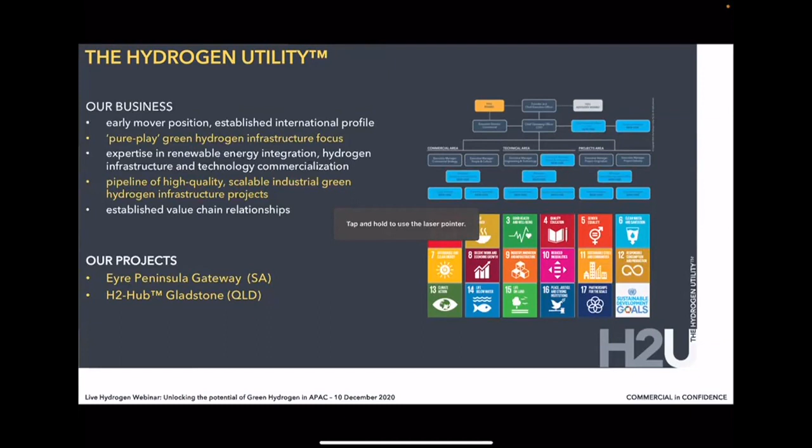Recently, one was in November. Mitsubishi Heavy Industries is now a strategic investor into H2U, our group, but also a technology partner when it comes to key components, really enabling us to scale up our infrastructure development activities, particularly around hydrogen compression, gas turbines, but also more broadly in terms of energy management and digital integration tools.

Just quickly talking about the market outlook, I guess the context in which we're all talking about green hydrogen is the falling cost of renewables. We're now in a situation where large-scale wind and large-scale solar PV are the cheapest form of new generation capacity addition.

There's quite a lot of movement, I believe, is one of the topics connecting green hydrogen and Asia Pacific, quite interesting on offshore wind as well. But really the interesting thing is the downward trend in the cost of renewables and how that cheap renewable power could be harnessed to open up new industries, particularly hydrogen.

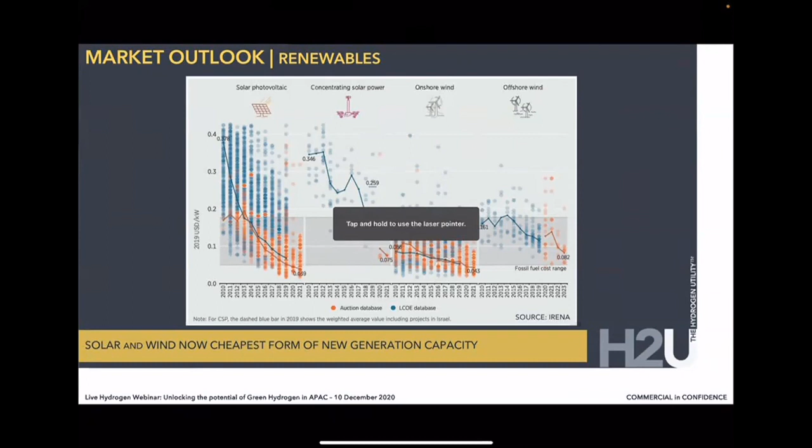In that context, we're also seeing the electrolyzer industry scaling up to meet the requirements of this market and address the market opportunity. What we're really seeing is a very large increase in production capacity in the market.

This is not unlike what happened with the solar PV industry about 15 years ago. The technology was already available, but the industrialization, the mass deployment really started 15 years ago. From about 1 gigawatt of production capacity in the solar PV industry, we witnessed growth to 110 gigawatts. We're working on more production capacity at the moment, but there's already a lot of plants that will take us beyond 50 gigawatts by 2030.

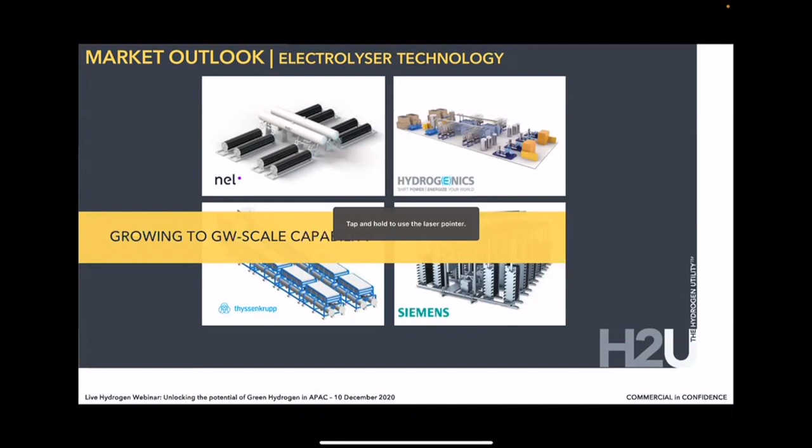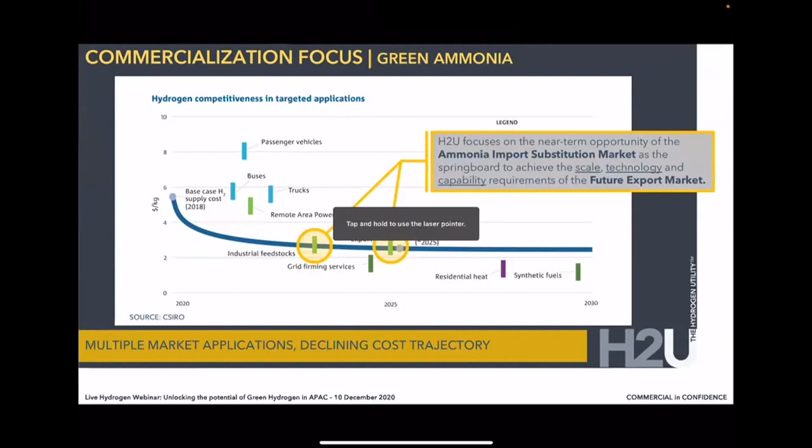Storage, but also industrial feedstocks, mining applications, and industrial feedstocks such as methanol or ammonia. But there is also a longer term trajectory around exporting hydrogen in one form or another to overseas markets. I believe Jeremy will talk about that as well, but also for the shipping market. We really focus on this opportunity around green hydrogen ammonia because, of the domestic uses and opportunities, it's the only one that really warrants the opportunity to work at the scale capacity that would be required.

Sorry, Dr. Attilio, I have to pardon, some audience reflected that there was a banner with the word tap and hold to use the laser pointer on the screen. Okay, I can see it now. Yes, okay, okay, sorry, carry on, it's the iPad.

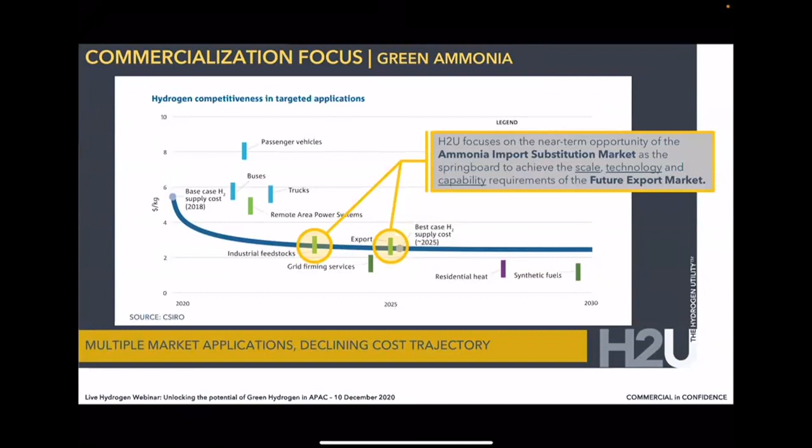There's an opportunity in different economies to look at the ammonia market as an early stage market that allows building at a scale comparable to the export market, because we've been talking about the electrolyzer supply chain scaling up to meet the requirement of the hydrogen market. But really the enabler is not the electrolyzers, it's the balance of plant capabilities and compression, the supply chain capabilities in terms of delivery, and also towards an export market and export terminal. This is really the quantum leap that will enable this type of industrial scale applications for green hydrogen. So with that in mind, we focus on developing a very large portfolio of projects.

As I said, 2 are in the public domain, but we also have others in Tasmania and in New Zealand. They're all giga scale projects. One characteristic of our projects is that they're all grid connected. So we're looking for strategic locations in the grid, as well as port accessible locations for the export market, because we see a unique opportunity to introduce these new large scale power loads to really support the development of hydrogen on one side, but also to help manage an intermittent renewable dominated grid in the future.

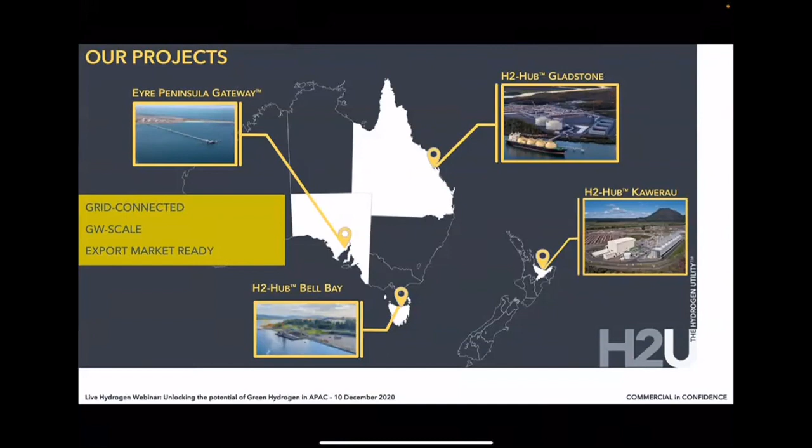We also made some advancements in particular on our Eyre Peninsula project, which we announced at the beginning of November together with the Premier in South Australia, having changed location to have access to a port facility, and the fact that the development still has a demonstrator stage, which is about 75 megawatts now, but will then be developed as a gigawatt class project over time.

We've effectively awarded, and we will announce early in the new year, the front-end engineering design. This is quite a unique situation, because in the space of green ammonia, our project is the first one globally to mark that milestone.

So it really will be the basis for developing this platform, really aiming to be breaking ground on the site towards the last quarter of 2021, and then commencing operational commissioning by the end of 2022.

That concludes my presentation, Bryce. This is my contact details. I hope to take any of the questions.

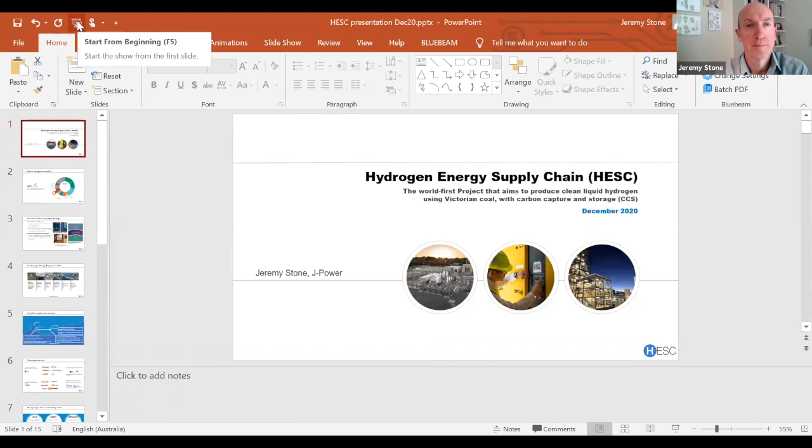For those who aren't aware, J-Power is a large utility company in Japan, about 25 gigawatts of total generation capacity. In Japan, we're about 50% renewable, and we continue to invest in a range of clean energy projects around the world, whether that be hydro, biomass, wind, solar, and of course clean hydrogen, which is the topic of today.

We are part of a consortium putting forward a world's first liquid hydrogen supply chain project. It's about $500 million, and it's located in Victoria, in Australia.

In terms of how did we get here, how did it start? Way back about 7 or 8 years ago, there was the Fukushima accident in Japan.

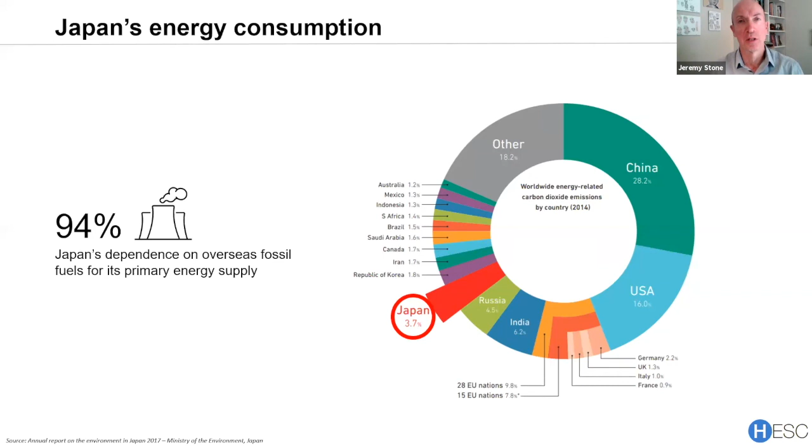Japan had very strong relationships with Australia, and there was existing gasification of coal technology and carbon capture and storage. Hence the aim and starting to build up the project in Australia.

Since that time, there's been many other countries who have now headed towards a hydrogen future. There's about 22 countries with hydrogen strategies, Australia being one of them, released a bit over 12 months ago. It's technology agnostic in terms of how hydrogen is produced, so it can either be with fossil fuel with carbon capture and storage, or it can be renewable, as Attilio was talking about before, the green hydrogen.

More recently, Australia's low emissions technology statement was released, and there were 5 key focus areas for technology development, one being clean hydrogen and the other being carbon capture and storage. So 2 elements very much connected with our project, and they set the stretch target of clean hydrogen at $2 per kilo.

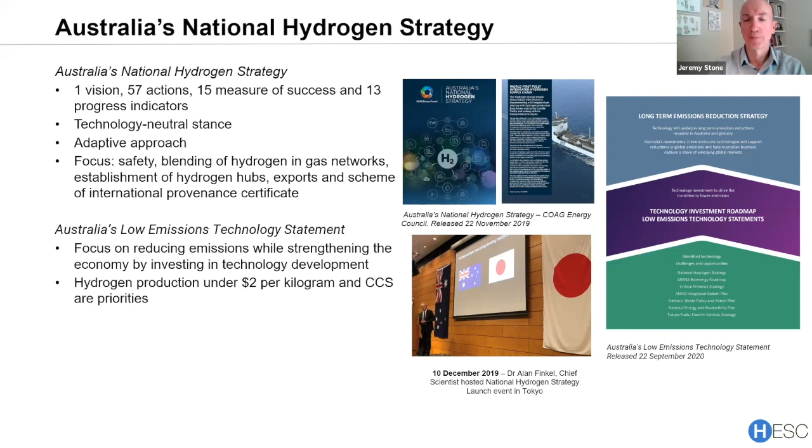In a snapshot, our project, as I mentioned, is a supply chain. It's not to prove up the production of hydrogen through gasification of coal, it's to prove up the complete supply chain.

Starting from the left, we have the coal gasification and refining facility. For the pilot stage, we will truck that gaseous hydrogen to the port of Hastings, where it is liquefied, taken down to minus 253 degrees centigrade. It then gets loaded onto a world's first liquid hydrogen ship, and taken to the port of Kobe in Japan, where it is offloaded.

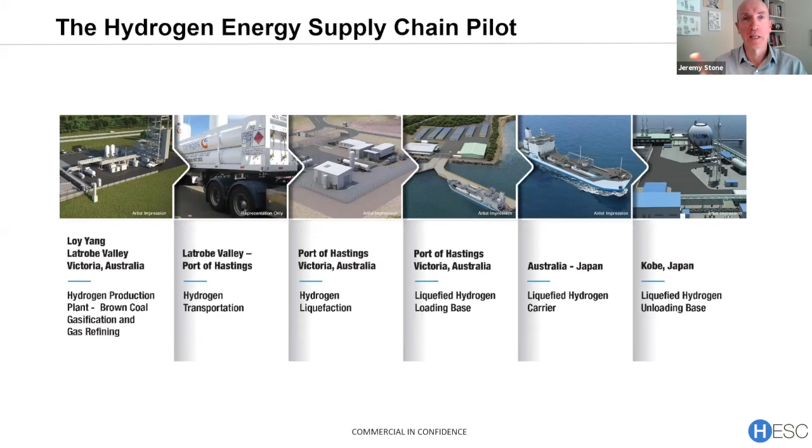So that's the complete supply chain, and I'll now run through the location of where those elements are, then the people involved and the status of those various elements.

For those who aren't familiar about where this all is, Victoria is the southern state of Australia. We are gasifying at the AGL Loy Yang site at the Latrobe Valley. We will then truck it westwards to the port of Hastings, an existing port, where it will be shipped out.

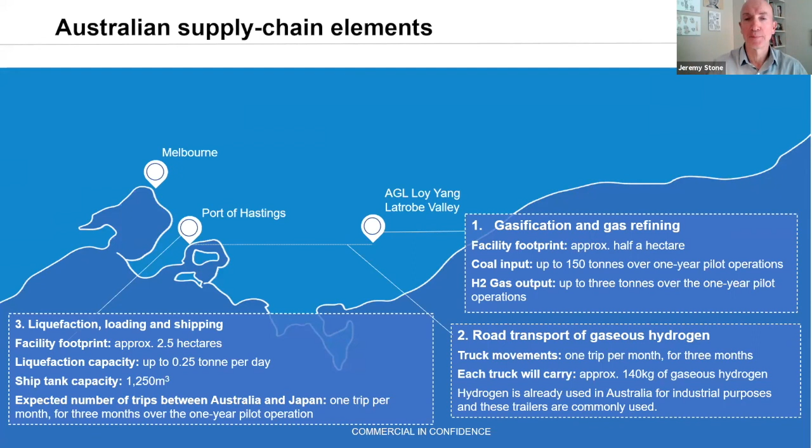Probably there's 2 main questions which we get asked, but I'll ask and respond to the first one here, and I'll respond to the second one in my very last slide. We get asked: well, if you can produce clean hydrogen from renewables, why would you produce it from Latrobe Valley coal? We say there's 3 main answers: one is urgency, the other is scale, and the other is affordability or sustainability.

In terms of urgency, we have an incredible climate change challenge in front of us. If you're aiming for net zero by 2050, we have to do a tremendous number of things all at the same time. We generally agree on where we're trying to get to, but most governments realise they need to undertake a number of different activities at the same time.

So this project, with existing and known technology, can actually save about 1.8 million tonnes of CO2 per year. That's equivalent to taking about 350,000 internal combustion cars off the road. That's what we could save per year if this project was in commercial phase.

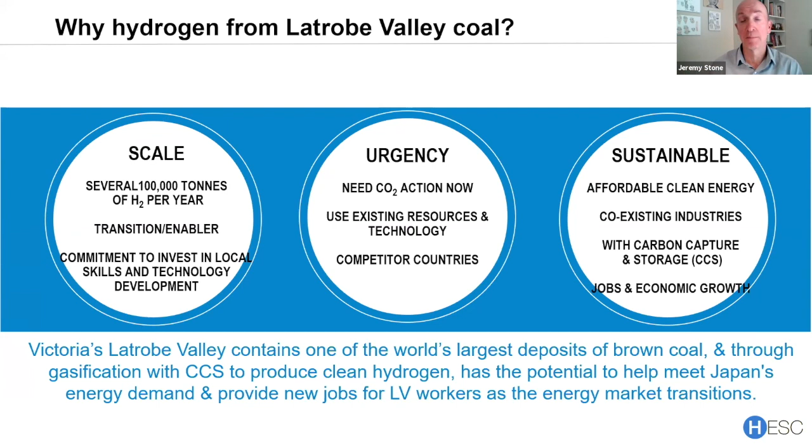There's also an opportunity with our form of production for byproducts like CO2 and excess nitrogen to be used for other forms of production such as ammonia, urea, building products, and methanol. So there is the opportunity for a circular economy in Gippsland, where this project is, enabling the startup of other industries as well. In terms of status, here we are at Latrobe Valley.

This is the gasification and refining facility. It's been built and finished. We're in the commissioning stage at the moment, hoping to start up operations very soon. About 150 jobs were created, and we continue our ongoing engagement with the local community, with webinars, and when we're allowed to we'll go back to face-to-face meetings as well.

In general, the community is supportive of clean energy. They also know their existing coal-fired power stations will soon be shutting down and transitioning out, so they see this as a nice way to move into some cleaner industries.

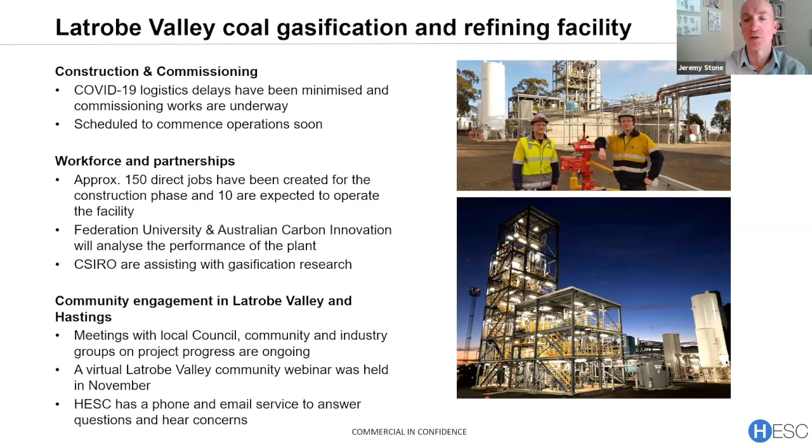At the Port of Hastings, again, this storage facility and liquefaction facility has been built. It's undergoing commissioning and, as per the gasification site, hopefully under operations very, very soon. About 60 jobs were created at this location as well.

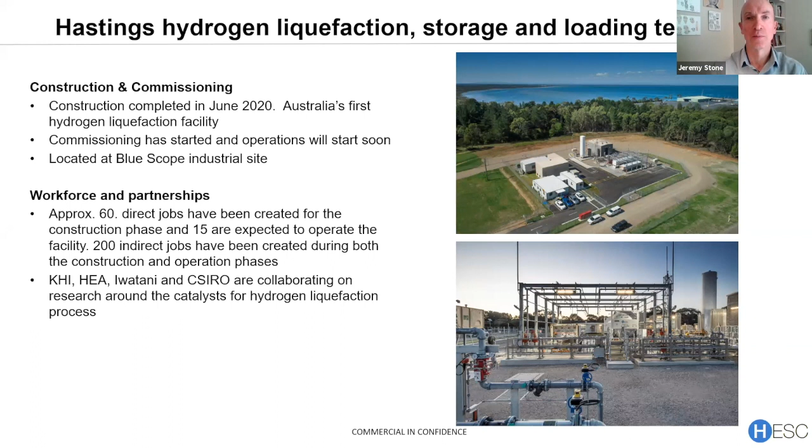This is the world's first liquid hydrogen carrier, launched last year in Japan, so it got a tremendous amount of press and worldwide attention. It's been undergoing sea trials, and it looks like it'll be in Australian waters around April of next year. It's very high profile, very cutting edge technology. As I mentioned, it's minus 253 degrees centigrade, so there are quite important and unique ways to keep the hydrogen cool on its transport to Japan.

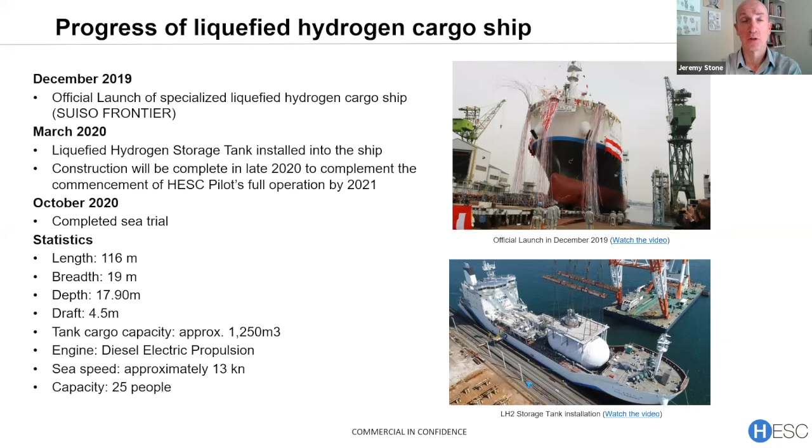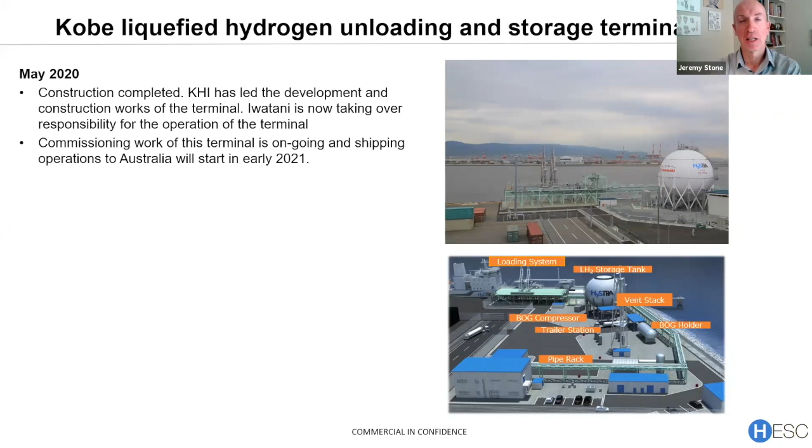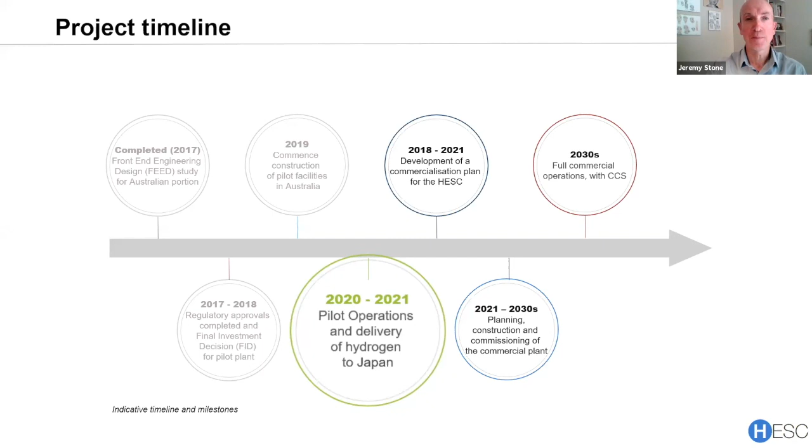The second question you may recall I mentioned as one of the two main questions we get asked is often a statement, usually around carbon capture and storage - that it doesn't work and it's too expensive. I'd like to talk about that briefly in the final two slides. As I mentioned, we would only go ahead with a full commercial scale operation if we had a carbon capture and storage facility, which we do. The evidence shows there are about 20 carbon capture and storage projects around the world.

The earliest carbon capture and storage sites have been around for about 45 years. There are 3 under construction at the moment and about 35 in various forms of development. The largest carbon capture and storage site is in Western Australia at the Gorgon gas fields, which can take up to about 4 million tonnes of carbon per year.

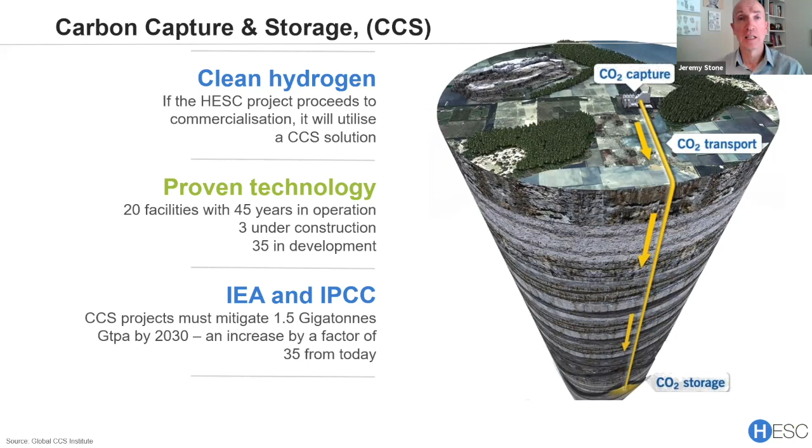Countries like the UK are very supportive of carbon capture and storage as well. They are actually implementing quite a program to take their carbon capture and storage from 0 tonnes per year up to 180 million tonnes per year.

Our partner would be CarbonNet, a federal and state government organisation which has been working on their carbon storage facility for more than 10 years. It's located very close to where we are, and that has some benefits. It's also regarded as one of the best in terms of scale, as well as its ability to quickly absorb the CO2 — one of the best carbon storage sites in the world.

It can store about 31 gigatons using depleted oil and gas reserves. So for those who aren't familiar, it's basically reverse engineering, where we've been extracting out oil and gas. In this instance, we inject back into the existing geological formation — we just inject back in the CO2.

The reason why we talk about cost: the cost of CCS will be embedded in our hydrogen cost. Why we believe our hydrogen cost can be reduced even with carbon capture and storage is because the carbon capture, which is J-Power's responsibility, becomes a byproduct of gasifying the coal. So when we gasify coal, we get hydrogen, but we also get a high purity, high pressure and temperature CO2. That form of capturing carbon is a lot cheaper than, say, a coal-fired power station, which is post-combustion.

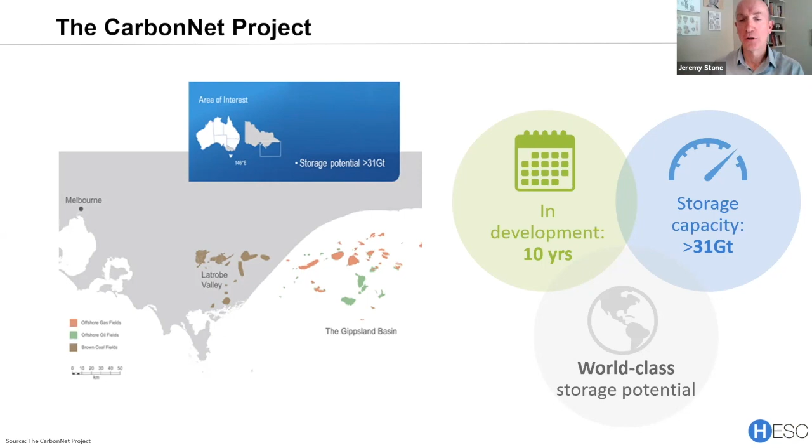You really showed us a great possibility of producing clean hydrogen by mining sector and export. Let me show my screen for you, and we still have some questions. We have 4 questions for you here, and the first is: what would you think would be the feasible ways to reduce the cost of clean hydrogen?

Well, I think Attilio mentioned green hydrogen, so he mentioned how to reduce costs there, which I think is fundamentally the cost of electrolyzers needs to come down, as well as the actual energy itself. For what we're doing, I think just technology continues to develop. The gasification of coal has been around for 20 or 30 years, and that just continues to get better, more efficient and cheaper. Carbon capture and storage equally continues — that technology continues to get more efficient and therefore cheaper as time goes on. So in terms of cost of production, investment and scale, ultimately, if you can build at scale, the cost of clean hydrogen does reduce dramatically.

Okay, and the second question is: what do you think is the biggest bottleneck, the big barrier in the hydrogen technology supply chain?

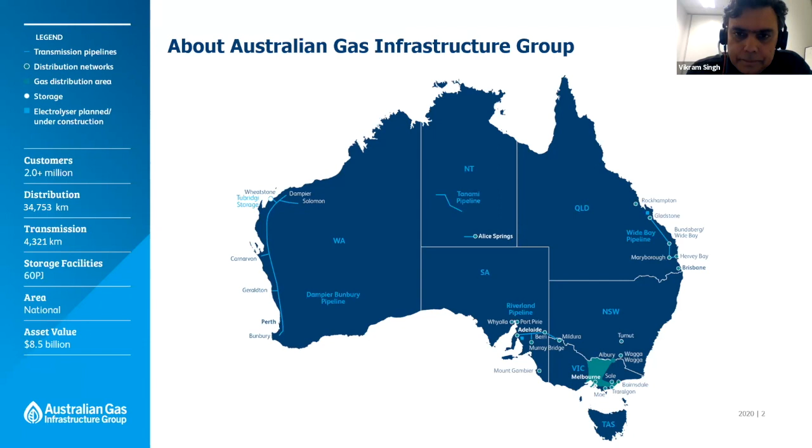It's not only the Australian Gas Infrastructure Group, but we are joined in our decarbonization journey by all the other gas distribution businesses in Australia. Collectively, we have developed the Gas Vision 2050 document and strategy. This is basically a pathway and a plan to decarbonize our gas networks by moving to 100% hydrogen networks with some biogas over the next 10 to 20 years, with a view to becoming and playing an important role in net zero by 2050.

There is some plan to our strategy. The plan was in this current 5-year period, which commenced 2017, we wanted to commence with demonstration projects and start blending a bit of hydrogen and biogas into our gas networks. Then over the next 5 to 10 years, really scaling it up and moving from 1 megawatt to 10, to 50 megawatt and 100 megawatt scale. Then over the next 10 to 20 years, and certainly by 2050, convert all our gas networks from carrying currently some methane to largely hydrogen. So that's the plan.

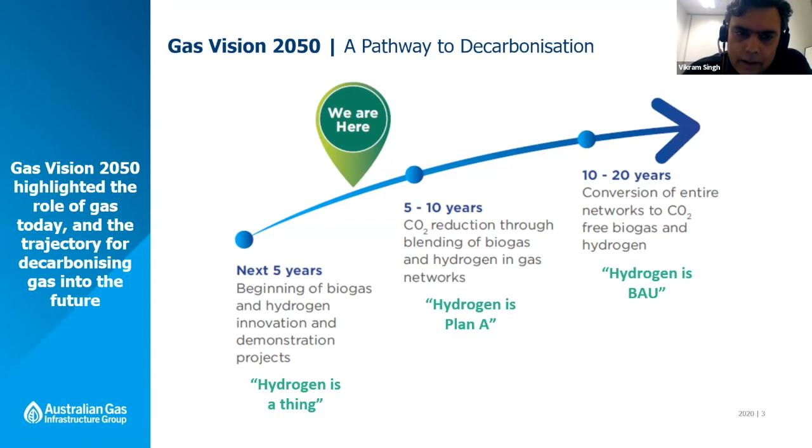Feasibility analysis in terms of storing large amounts of hydrogen up north in WA. We are doing a feasibility study on a transmission pipeline. And in South Australia, we're developing a project. In Victoria, we're developing projects in Queensland, and also collaborating with several governments and industry players through our Australian Hydrogen Centre. So we're very active right across Australia.

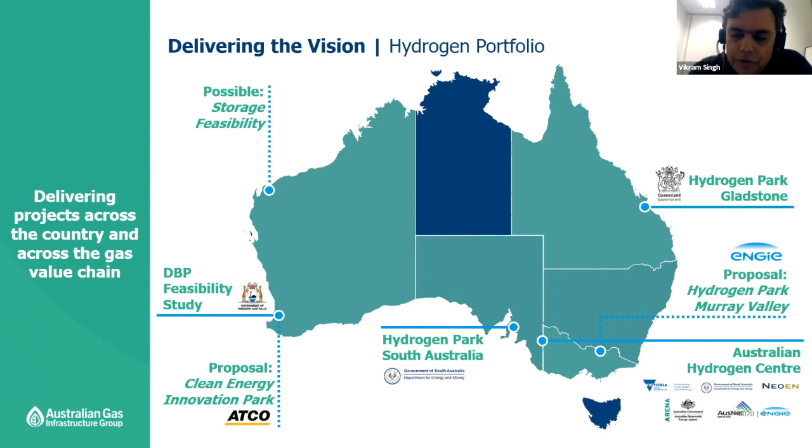I'll share with you some of the details on our key project. The first one, which really kick-started our journey, was Hydrogen Park South Australia, or HyPSA. This was a $12 million project with around $5 million support from the South Australian government. It's a 1.25 megawatt electrolyzer, and the aim really is to start blending 5% renewable hydrogen into a part of our gas distribution network in Adelaide.

The way we've done it is we've isolated a suburb, and over about 700 homes will start receiving 5% renewable hydrogen by January, February of next year. The facility is up and running. The construction is complete. We achieved first production in late November in 2020, and we will finalize our commissioning at late January, with commercial operations really starting in February 2021.

We have also got a contract with BOC to supply industry via tube and trailer, and we are considering refueling as well. So it's quite a significant project, with small scale blending into a public network. You can see pictures there in terms of the electrolyzer being installed and all the other balance of plant items.

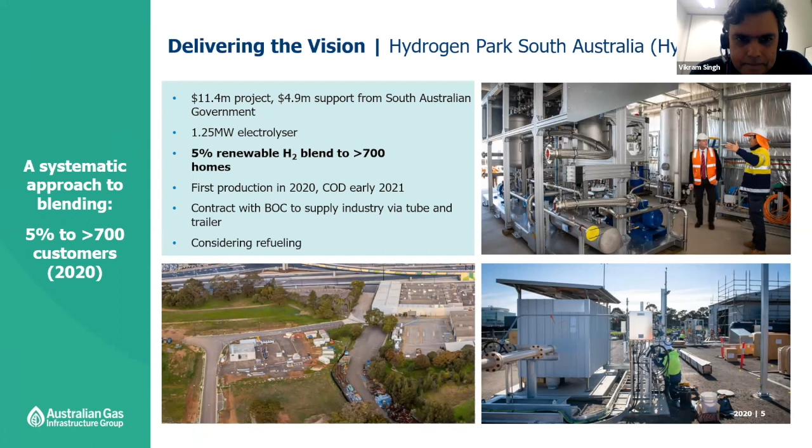This shows the project location. It is located near the old Mitsubishi assembly building, which has been converted into the Tonsley Innovation District, where several renewable energy projects are being deployed and developed. You can see on the left-hand side an aerial shot of the old Mitsubishi assembly building being redeveloped.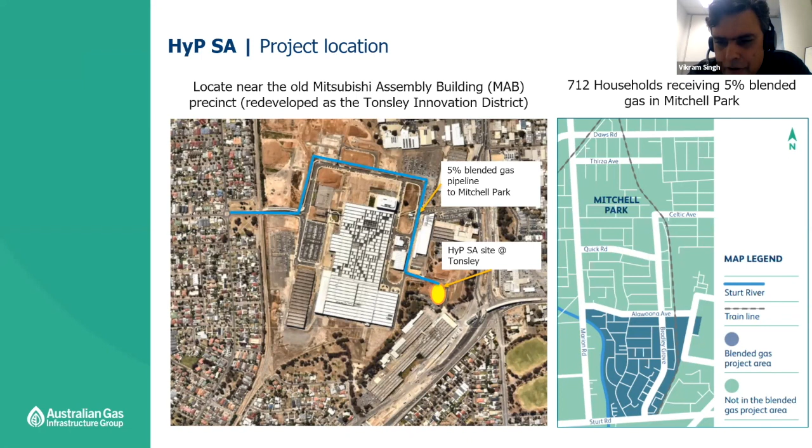The yellow oval is where our plant is located, and the blue is the blended gas pipeline going into the suburb of Mitchell Park. On the right-hand side, in the dark blue shaded area, is the area of Mitchell Park suburb, which we have isolated, where customers will start receiving 5% hydrogen blended gas early next year.

It was a very significant project, the first renewable hydrogen production facility getting into a public network in Australia. We started our FEED in 2018, and I won't take you through all the stages of the project, but I will highlight the part on engagement.

We undertook extensive customer engagement to ensure that we had support right across, not only from regulators and stakeholders to the wider community as well. This has really been quite a big learning for us in terms of the benefit of early engagement with key stakeholders, including the local community that would start receiving 5% blended hydrogen. It's been very positive, and everyone's been very supportive.

We have developed an extensive website, and the link is displayed here. I would encourage everyone, if they're interested in the extensive engagement program and the information and feedback sessions we've had with community groups, to go and visit the website. There's some really useful material on that website.

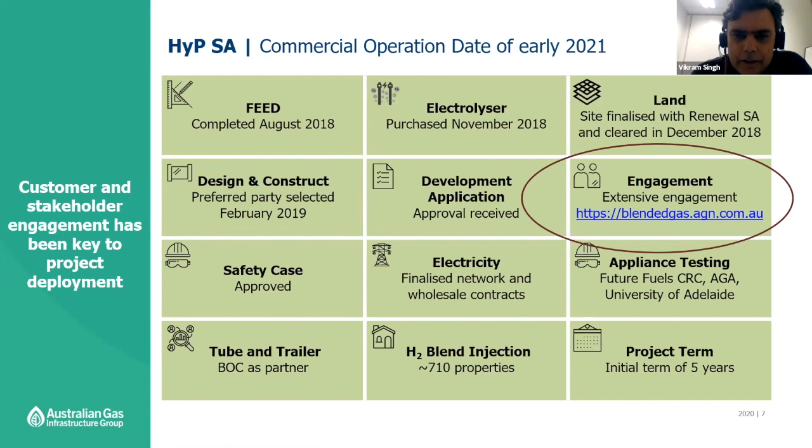We've also developed the Australian Hydrogen Centre. This has been backed by ARENA, the Victorian and SA governments, and industry partners. So we have Neoen, AusNet and ENGIE, and ourselves and industry partners, and the Victorian and SA governments as partners as well. In this centre, we're doing 3 key projects.

The first is feasibility studies to blend 10% hydrogen into selected regional towns in Victoria and South Australia. Then we will do detailed feasibility studies to blend 10% renewable hydrogen into the gas networks of Victoria and South Australia. The third feasibility looks at converting these networks to 100% hydrogen networks.

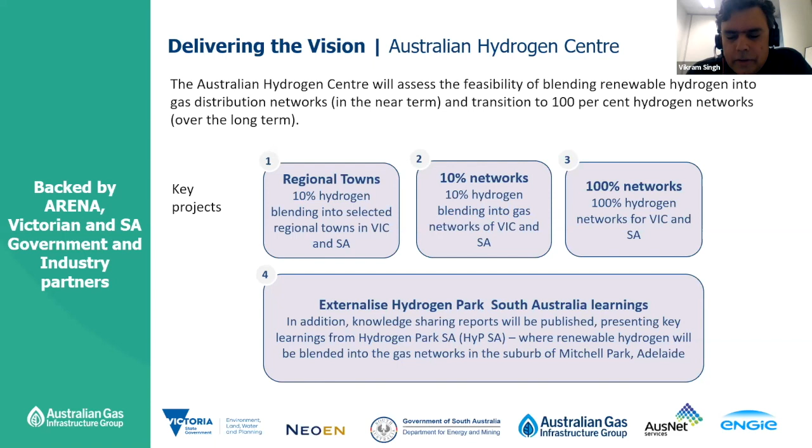That work is well and truly underway, with the regional town feasibility studies completed in March, and the 10% and 100% feasibility studies draft reports to be developed by the middle of next year, with final reports towards the end of next year. That is quite a significant undertaking, and will lay the blueprint for large-scale deployment of renewable hydrogen facilities to start scaling up the decarbonization of gas networks.

We are also developing another project in Gladstone, a regional center in Queensland, where we are putting a small electrolyzer and injecting up to 10% renewable hydrogen into the entire city network of Gladstone. So from HyP SA, where we had 5% to 700 customers, mainly residential, we're going up to 10% to the entire city network of Gladstone. So that's our scale-up plan.

The construction has not started for HyP Gladstone, but will start very shortly. We have placed the order for the electrolyzer and the long lead items, and we are hoping that we will be online at HyP Gladstone by the end of 2022.

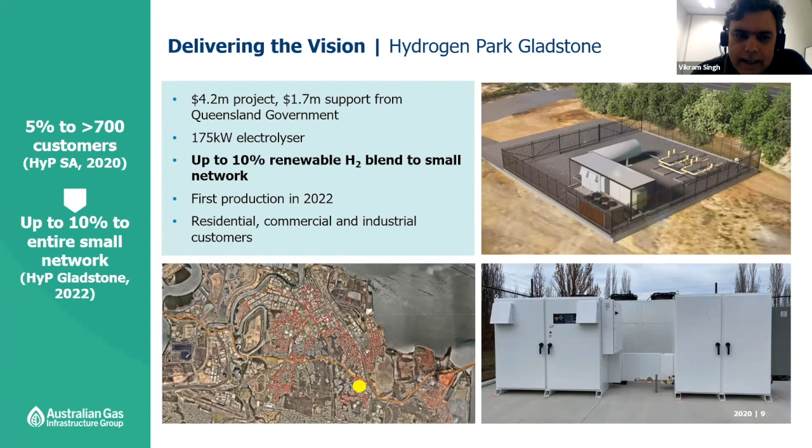We're also developing projects that move us from 1 or 2 megawatt to a 10 megawatt scale, and we are developing 2 projects. The first one is Hydrogen Park Murray Valley. We are developing it in partnership with ENGIE, and this is a 10 megawatt electrolyzer. It's around a $40 million project, where we will produce renewable hydrogen and blend up to 10% into the city networks of Albury and Wodonga.

First production is targeted in 2023. It's co-located with Northeast Water's wastewater treatment facility, and there are some strategic benefits of co-locating electrolysis with the wastewater treatment facility in terms of sharing infrastructure and potentially an oxygen offtake to the wastewater treatment facility as well.

The second one is the Clean Energy Innovation Park, where we are partnering with ATCO. Once again, it's a $40 million project, a 10 megawatt electrolyzer, injecting into the ATCO gas distribution network through our transmission system. Once again, the first production is targeted at 2023.

Both these projects have been shortlisted by ARENA as one of the 7 projects competing for funds under the $70 million Hydrogen Development Fund being administered by ARENA. Both projects' full applications are due the 20th of January next year.

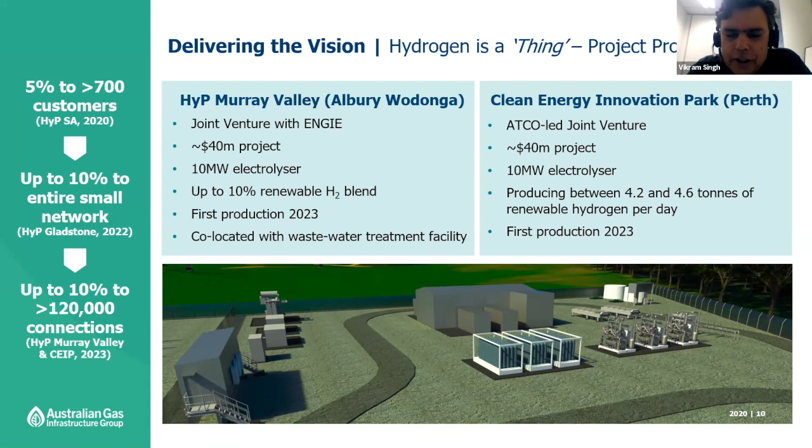Just touching a bit more on Hydrogen Park Murray Valley. It's a $40 million project co-located at the Wodonga wastewater treatment plant. This is a scale project where 10% renewable hydrogen will be blended to around 80,000 customers in New South Wales and Victoria. A very significant project, which has been shortlisted by ARENA for further funding.

The location is very strategic as well. It's located right smack bang, very close to the Hume Highway, which is a major heavy haulage route between Sydney and Melbourne. So it's ideally placed for supporting mobility as well, and also close to large industrial customers. We are working with them to deploy hydrogen applications such as forklifts as well.

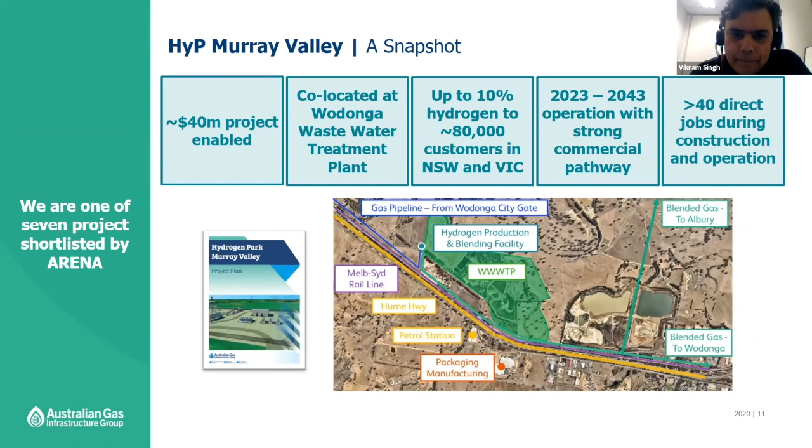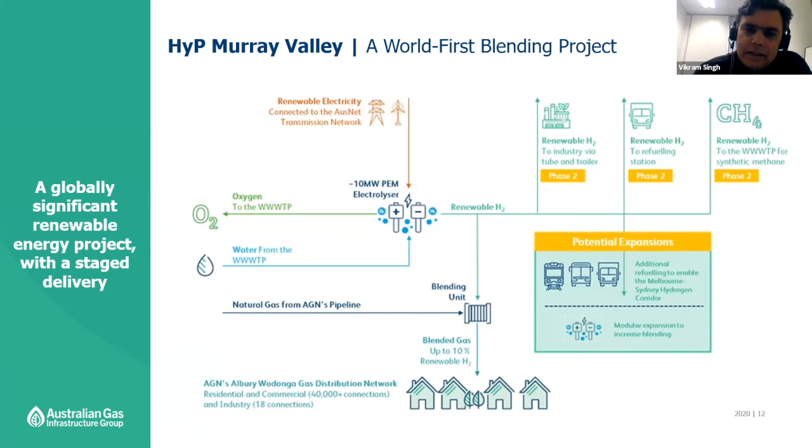We are very well located, and that is exactly the reason why we chose Hydrogen Park Murray Valley, located at Wodonga. Through our projects and through our journey, which we're now into, it's been 3 years, and we have learned lots of lessons.

The first one, which is very encouraging, is that customers, all our customers, expect us to develop low carbon options, and they are receptive to future fuels and willing to pay a small premium for them. So that is very encouraging. We have been encouraged by all the results of focus groups and customer interactions.

The other important thing to note is that networks are hydrogen ready. In terms of all our distribution networks, they are polyethylene, and they can take large amounts of hydrogen. There is some cast iron, but we are undertaking a program to replace our cast iron mains with polyethylene, and we should have fully replaced our cast iron by 2035. But by and large, networks are ready or will be ready to take large quantities of hydrogen.

Safety is obviously non-negotiable. We are working with customers, and not only with customers, with key safety regulators to ensure that when we do blend hydrogen in large quantities, all our asset management policies and maintenance practices take the blended gas into account.

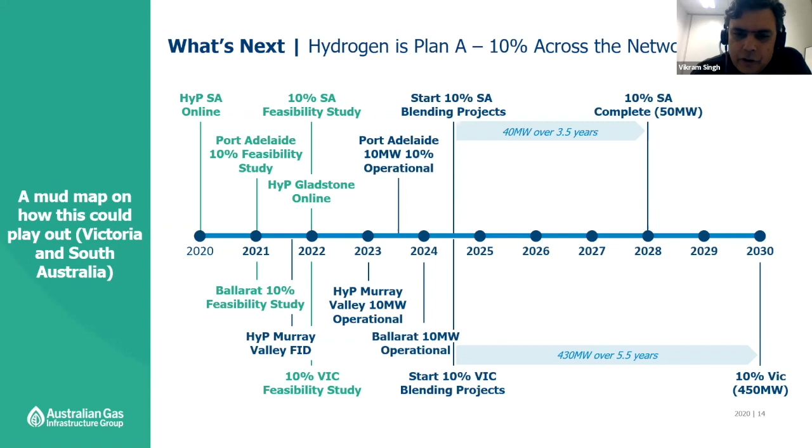By that time, we would have finished our detailed feasibility studies to put 10% hydrogen into South Australia and Victoria, and we will start deploying that at scale from 2024 onwards, with a plan to deploy more than 500 megawatts of electrolysis by 2030, thereby achieving our objective of putting 10% renewable hydrogen into our gas networks in Victoria and South Australia.

That's all I had by way of presentation, and we have hydrogen barbecues, which we deploy quite regularly at functions and events, both in Adelaide, in Victoria, in Melbourne, and in Queensland, and in Perth. Post COVID-19, when we do have these seminars at conference events, we're more than happy to wheel out a hydrogen barbecue and invite everyone to our next hydrogen barbecue, hopefully in the not too distant future.